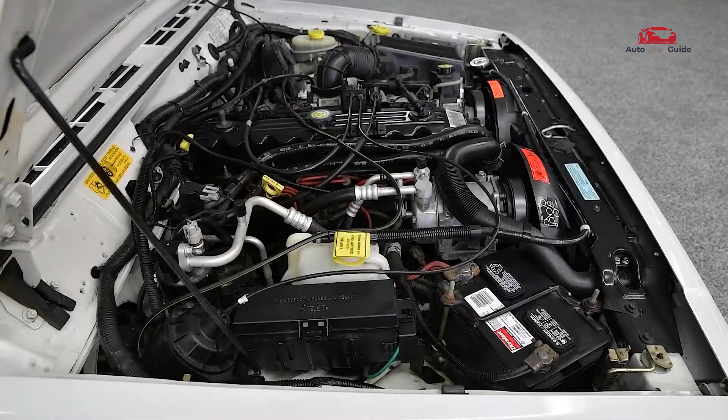Curious about the fuse box location and diagram for the Jeep Cherokee, 1997 to 2001? Wondering where each fuse panel is and what its functions are? This guide answers all your questions, helping you easily locate and understand every fuse.

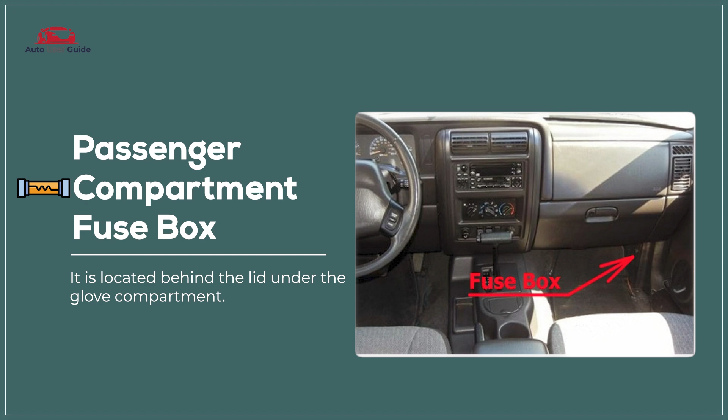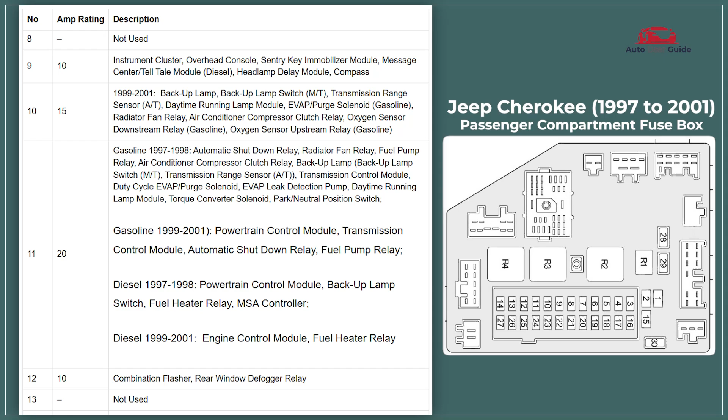Passenger compartment fuse box. The passenger compartment fuse box in the 1997 to 2001 Jeep Cherokee controls circuits for interior components like lights, radio, and power windows. It includes fuses and relays essential for electrical system protection. Each fuse is labeled for easy identification and replacement.

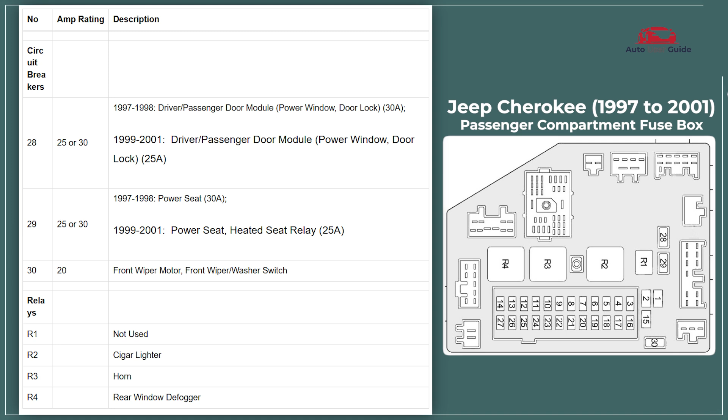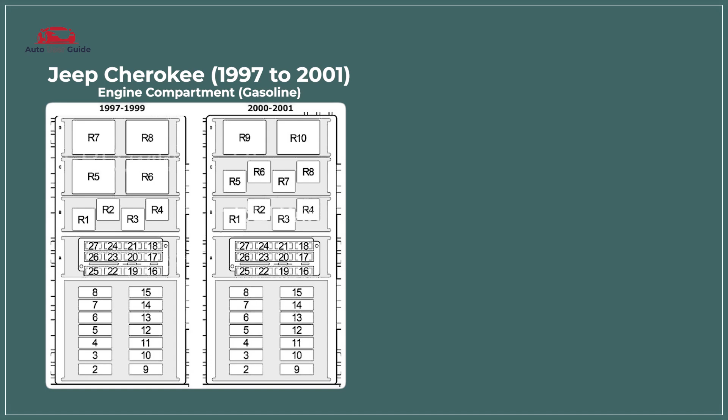Engine compartment fuse box. The engine compartment fuse box in the 1997 to 2001 Jeep Cherokee gasoline manages high current circuits like the fuel pump, cooling fan, and ABS. It houses maxi fuses and relays for critical engine and drivetrain functions. Designed for durability, it ensures reliable power distribution under varying conditions.

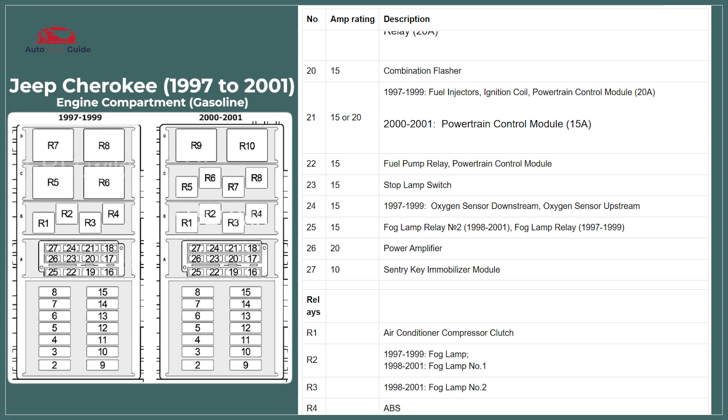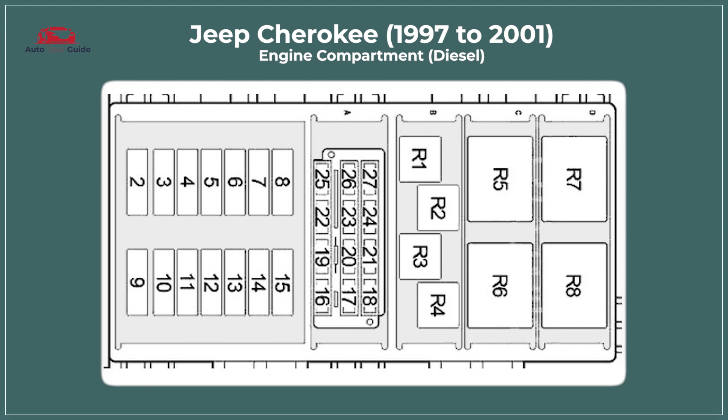The engine compartment fuse box in the 1997 to 2001 Jeep Cherokee diesel supports major systems like glow plugs, fuel injection, and engine management. It contains high-capacity fuses and relays tailored for diesel-specific components. Built for efficiency, it ensures stable operation of vital powertrain elements.

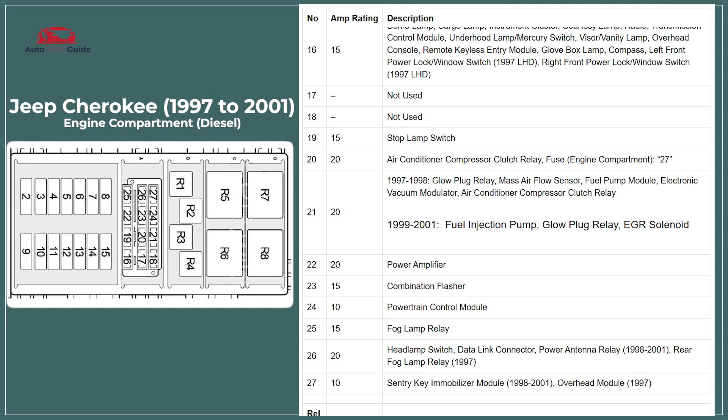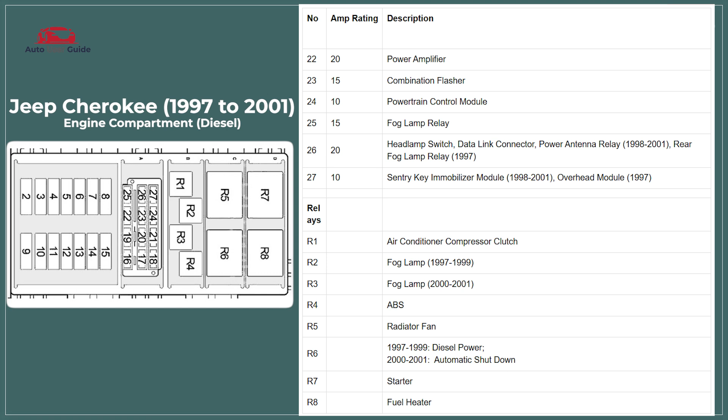Types of fuses: blade fuse, standard blade fuse, mini blade fuse, maxi blade fuse, micro 2 fuse, micro 3 fuse, J-case fuse.

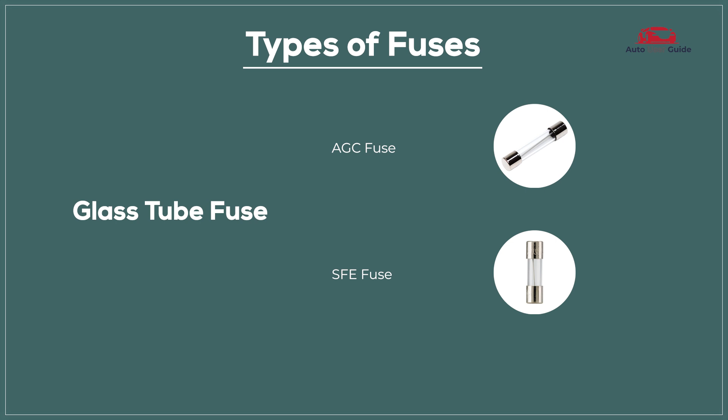Glass tube fuse, AGC fuse, SFE fuse. Ceramic fuse, Bosch fuse, DIN fuse. PAL fuse, low profile PAL fuse, standard PAL fuse. Link fuse, mega fuse, high amperage link fuse.

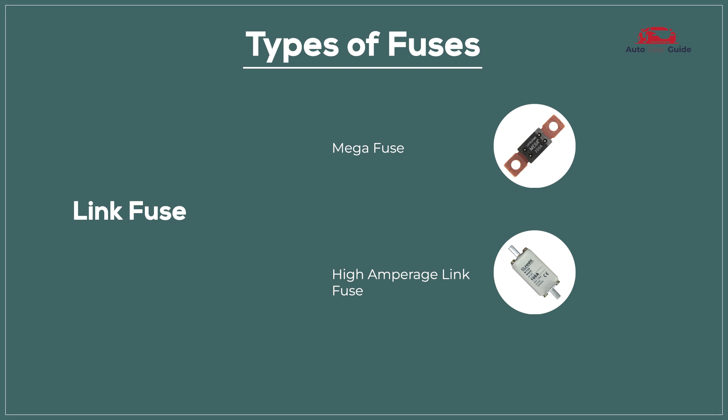Fuse conditions: blown fuse. A blown fuse means it's no longer functioning and needs replacement, while a perfect fuse is in good working condition and performing as expected.

How to change fuses: turn off the vehicle, locate the fuse box, identify the faulty fuse, remove the faulty fuse, inspect and obtain a replacement, install the new fuse, test the replacement.

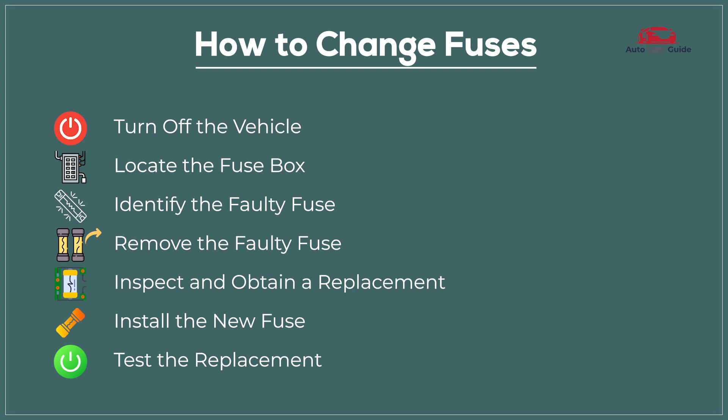Safety precautions: disconnect the battery, wear protective gear, use proper tools, check for correct amperage, avoid water exposure.